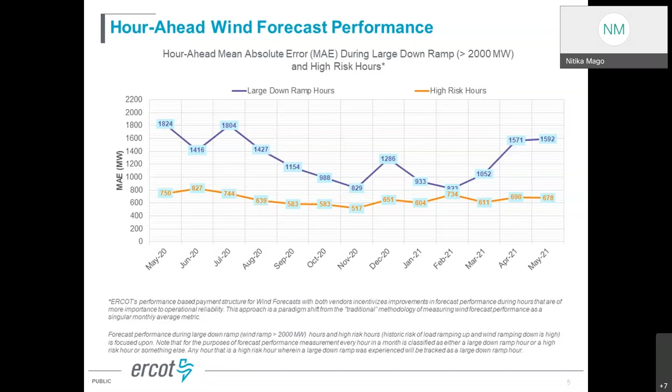And this is important because the forecast that we receive gets used in all of our look-ahead studies, so reliability unit commitment, outage coordination, next day studies, all use the most recent forecast we receive. So we want to make sure that those forecasts are appropriately capturing the conditions that the grid will be experiencing.

In 2017, we also added a new desk in our control room called the Reliability Risk Desk. And really the background here was with the amount of wind and solar resources that we were adding, the type of variability, the type of risk assessments the control room was having to do was growing, and we felt we needed a dedicated desk in the control room to run those what-if assessments, to run those risk assessments and communicate with the traditional desks on actions they may need to take around ensuring the forecast that they are selecting is appropriate for conditions that are coming on, ensuring that the units that are operating are following our performance requirements the way we want, and so on.

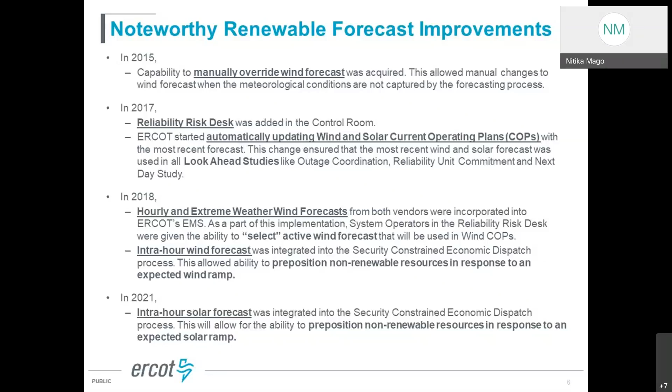So the STWPF, which is the 50th percentile probability of exceedance model. The extreme weather has 2 versions of it, so they've got extreme weather 1 and extreme weather 2. And the control room has the ability to select which model will be active. So through this we make sure that the forecast that is selected represents the conditions that will be coming.

Philosophically, this display was set up to replicate the existing displays we had for load forecast. Load forecast is also inherently built into our EMS, and the control room has the ability to toggle between models based off of the conditions that they expect to be the most representative of the grid conditions. This display was very similar in its usage to that particular tool.

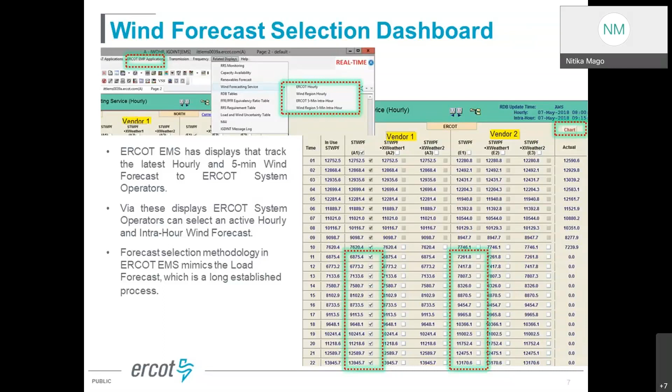As the conditions on the ground worsened, our wind resources started submitting outage data in our outage scheduler, and the forecast that we were receiving started showing us essentially only the remaining forecasted impact. So through this, we were able to maintain our line of sight on what we could expect the supply from our wind resources to be during that extreme weather period.

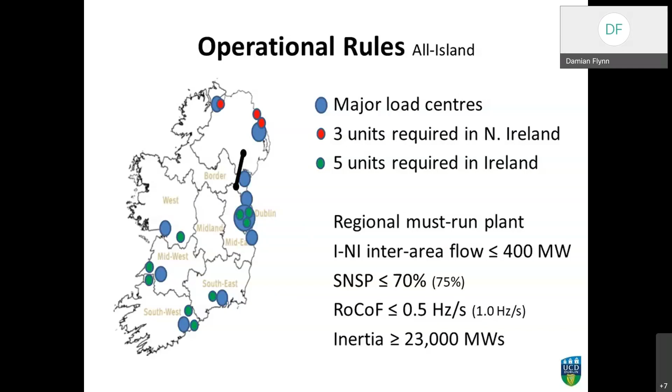And then there are also various dynamic limits, rate of change of frequency. Currently the limit is 0.5 hertz per second. There are trials underway at 1 hertz per second. And there's also an inertial limit of 23,000 megawatt seconds.

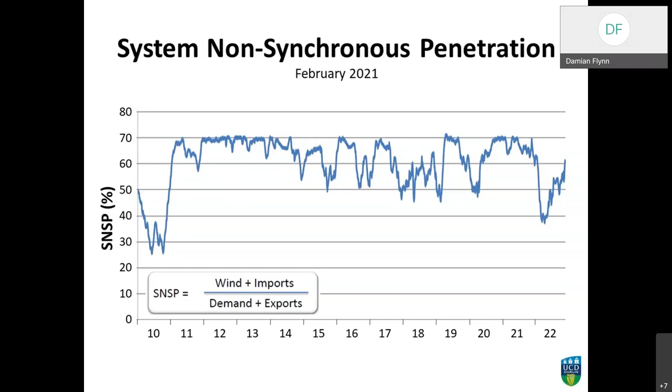So what we have in Ireland is a system that is operating at its limit in terms of system stability at certain times. And that does mean that there is curtailment or constraints on the system.

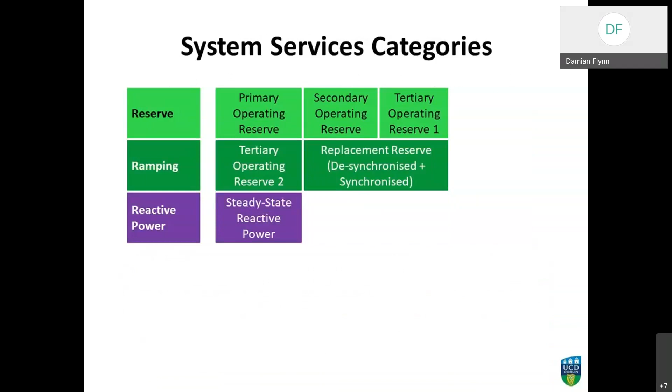There are also a number of system services on the system. Traditionally, there would have been 7 system services. In the last couple of years, because of the levels of wind on the system, that number has increased to 14. You can see there are 3 additional ramping products. There's also a synchronous inertial response product, which is designed to give you synchronous inertia, but also to reduce min-gen levels on the system. And then also a number of fast acting products, which I'll talk about later.

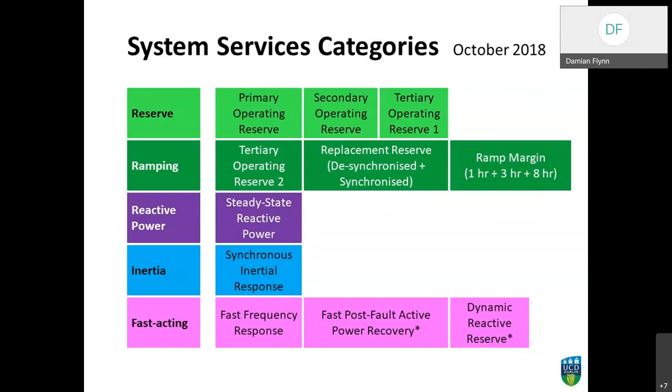These system services are arranged either through tariffs or contracts. There are set prices, and then there are a number of scalers which encourage people to improve their performance. If you can provide faster than default response, you get a larger payment. If you can provide a dynamic response as opposed to a stepped response, again you get a larger payment. If you're able to supply a number of products in sequence, from a fast frequency time frame through a primary, through a secondary, through a tertiary time frame, again you get increased payments. So it's about encouraging flexibility to the system and going beyond the standard definitions of the products.

So that was a quick overview of the present day. Now let's look towards the future.

Since 2019, there has been a change of government in Ireland, and the new Minister for Energy is from the Green Party, which has very much encouraged the Irish government's motivation to do more in terms of climate action. Earlier this year, there was a climate bill released, which targeted 51% emissions reduction. That emissions reduction, if you work it out, is actually more ambitious than the various renewables targets and the onshore wind and grid scale solar. So it's expected within the next couple of weeks that these existing targets are going to be further raised. So we have high ambition as it is, but that ambition is going to be increased. That would be the expectation.

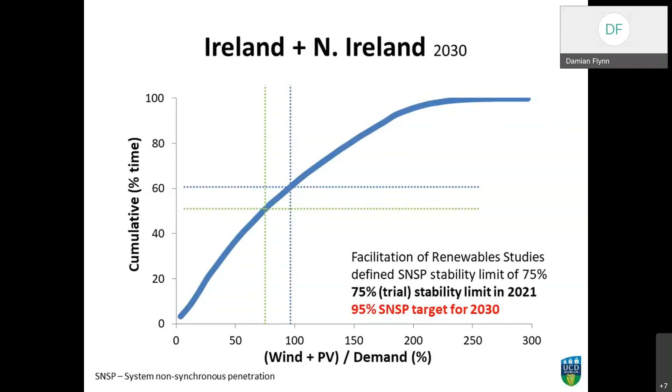And Ireland is an island system, so it has limited export opportunities. So as part of a European project, EU Sysflex, led by EirGrid, one of the things that was done across the European system was to look at the scarcities in terms of stability challenges, for continental Europe, Ireland and Northern Ireland, and the Nordic system. If we focus on the Ireland and Northern Ireland system, you can see, perhaps not surprisingly given Ireland's ambition and given that it's a synchronously isolated system, that there are a lot of red issues - a lot of stability issues that need to be resolved.

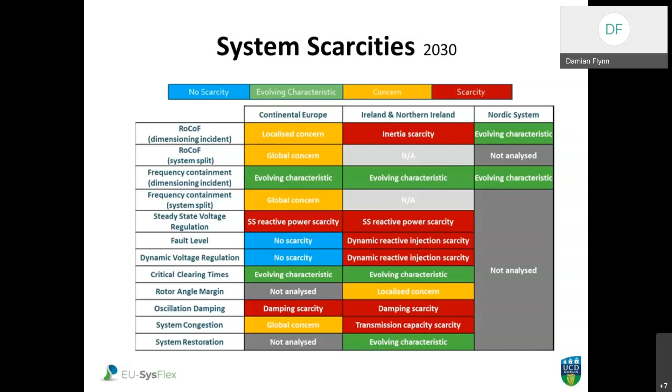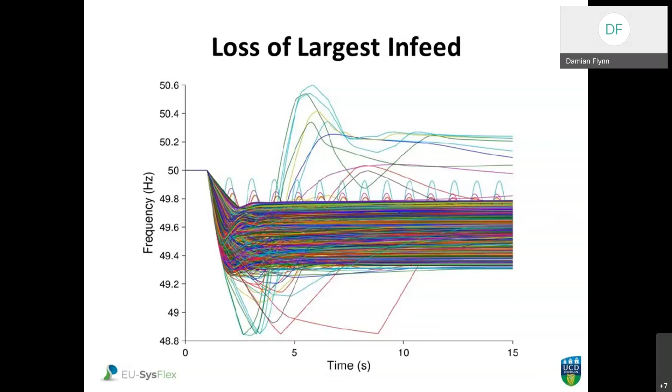If you then look at individual traces, you can actually see that there is quite a lot of variation. The first thing is that because you have a very high wind and solar PV system, things happen very quickly, and you can have cases of low frequency transients, but you can also have high frequency transients depending on how you set up your static reserve for the system. As you remove more conventional generation from the system, then steady state reactive power becomes a challenge, and hence there's a need for steady state reactive power system services.

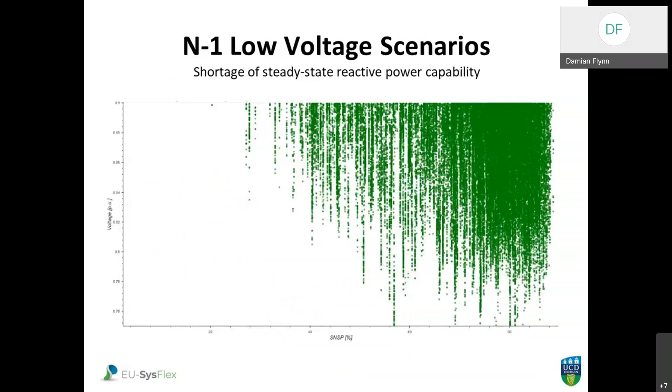Similarly, your network can become overloaded. So at the moment, there isn't any congestion-related system services, but there are thoughts that perhaps in the future there might be system services that encourage congestion relief measures. And of course, if you look at fault conditions as well, this is looking at faults in 2 different locations, A and B, 2 different time steps. If we focus on the green curve, you can see that there is a lot of oscillatory behavior, which again is promoting the idea of a system service related to dynamic reactive response.

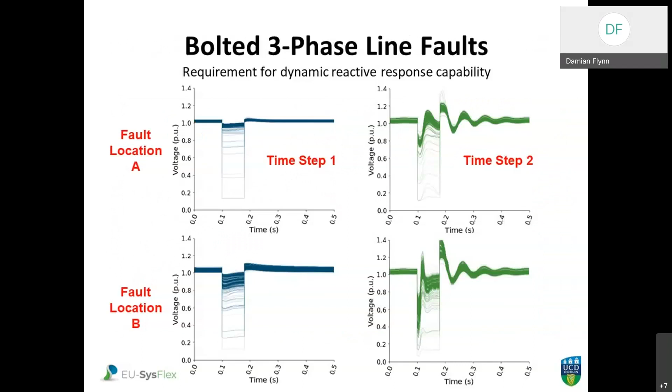So I suppose those stability issues are reasonably familiar. If I mention one that is perhaps not quite so familiar, the idea of a voltage dip induced frequency dip. On the top curve, the voltage trace, we're looking at a voltage dip that has occurred somewhere in the network. And in the lower figure in red, what we're showing is the typical response of a conventional generator, so that once the fault clears, the power output quickly recovers to its nominal level. For a wind turbine, it may take some time to recover to its full output, and so there is a power imbalance briefly, hence the shaded or hashed blue area.

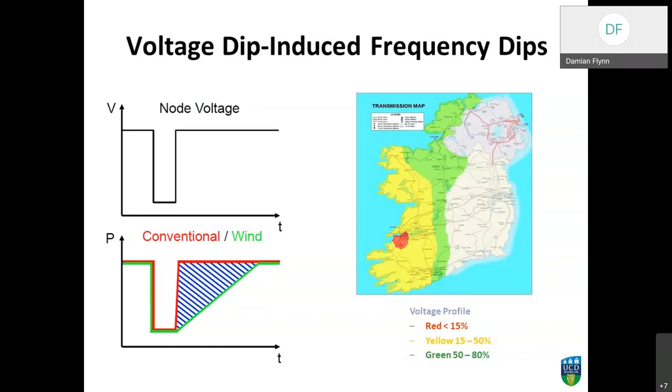So the concern would be that if you have a fault in, let's say, the red location on the map, and you've got a lot of wind turbines or wind farms nearby, then they could all see a large voltage dip, and then they could all see a drop in power for a short period of time. This is just an illustration of the problem. If you look at the lower figure, you can see that the power imbalance goes down to a level of around 3,000 megawatts. To put that into context, if you remember back to my earlier slide, I was talking about the Irish system having a peak demand of 6 or 7 gigawatts. So losing 3 gigawatts, even if it is temporarily, is an interesting problem to solve.

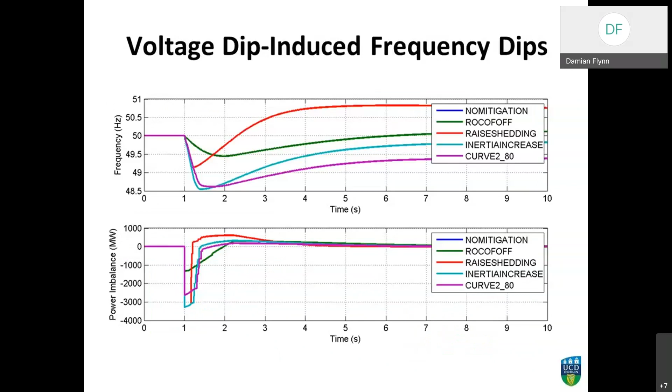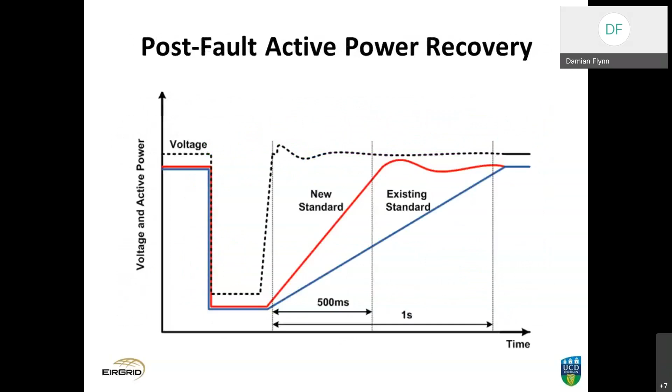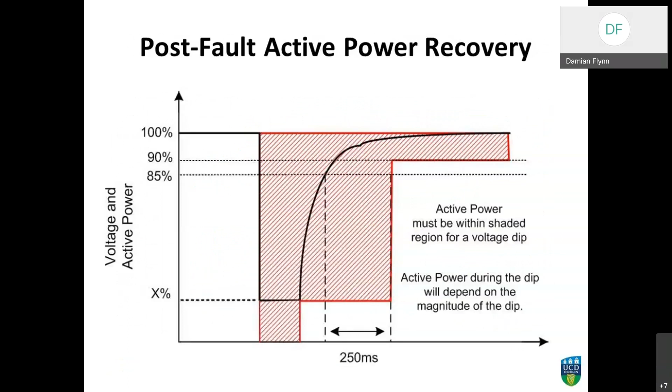So the solution has been to modify or propose modifications for fault ride-through characteristics. So originally, the recovery time was set at 1 second. That was reduced to half a second. And a system service has also been introduced called the post-fault active power recovery service, which further encourages participants to provide a response within 250 milliseconds or to recover within 250 milliseconds.

If I can also talk a little bit briefly about 100% SNSP. So yes, Ireland is looking at 95% SNSP by the end of the decade, but that's not too far away from 100% SNSP. So as part of another European project known as the Migrate project, studies suggested that perhaps a third of converters, whether they be wind or PV, should be grid forming. And it would be beneficial if that grid forming capability was distributed around the system.

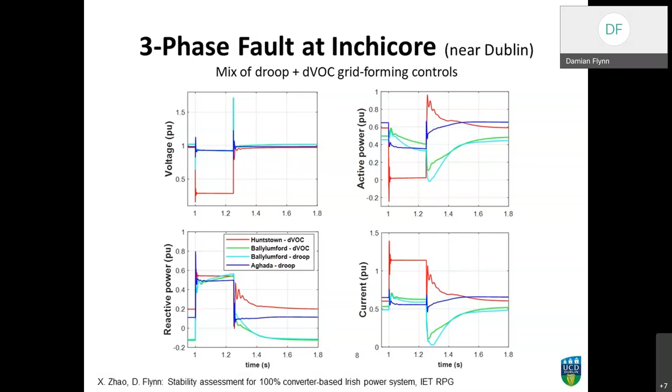So the final thing I want to talk about is, again, going back to forecasting, but I'm using forecasting here in perhaps a slightly different timescale to the other presenters. So I'm looking at forecasting towards the end of the century. And what I'm thinking about here from a system adequacy point of view is, as we add more wind and solar to the system, is there the possibility that there will be periods of insufficient generation to meet the demand?

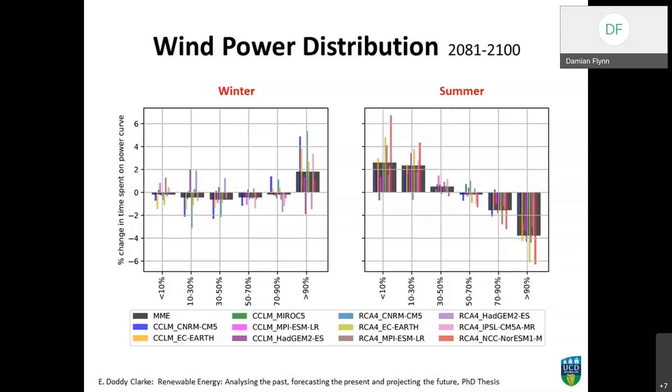So the winter time, that's good news for Ireland because it tends to have a winter peak. In the summertime, it will be less windy, but the contrast is that there should be solar PV on the system, which will help under those situations. And as I say, the question of interest is looking at periods of extended low power. So my definition here is a period of 1 day or longer whenever the power levels are less than 10%.

So if I just end up with some final questions that I suppose are of interest to all systems. One, Ireland is looking at how it can achieve cost-effective operation with increasing renewables and getting closer and closer to a system that is just wind and PV effectively for significant periods of time. A challenge for many systems is how can you do this without building new transmission lines? And how can you maintain system adequacy if you're moving to variable generation?

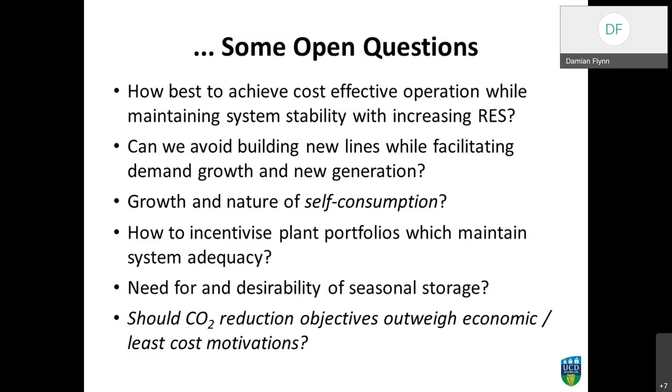So the next speaker, or the final speaker, is Rhett Trease from Duke Energy. Rhett's a lead engineer. He's worked in real-time operations and unit commitment in all of Duke Energy service territories. He's a former load and solar forecaster and was a lead engineer in their fuels and system optimization before moving to his current role in the integrated system operations and planning group. So Rhett's going to talk a little bit about how Duke are thinking about reserves and forecasting.

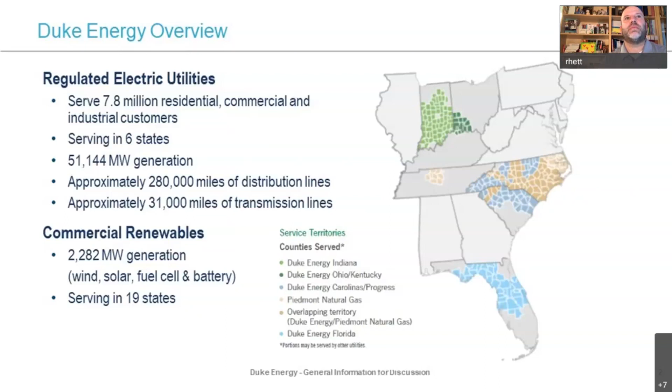We serve 7.8 million customers and a little over 51 gigawatts of regulated generation. We also have our commercial side of the company with a little over 2 gigawatts of renewable generation. And some of the challenges we're facing here sound kind of familiar to everybody else. North Carolina is the largest state in the country for PURPA solar penetration. We have a lot of solar in DEP already, and it's growing at a very steady and predictable rate. We have a lot of DEC. It's starting to pick up in the Carolinas, and certainly in Florida it's picking up at a very fast pace, both rooftop and utility scale solar.

One of the challenges we face in the southeastern portion of our territories is we tend to be winter peaking, which is a little backwards, but it does get cold in the south, and we have a lot of heat pumps and a lot of resistive and electric heating. So we have a lot of solar. It's not very windy towards the southeast U.S. There's not a lot of wind generation, but a lot of sun. And we'll tend to peak in the morning when it's dark out, and then solar will pop up, and these ramps are starting to get fairly severe. Then they'll go away, and we'll get our typical duck curve.

In the Carolinas, we also have 11 nuclear units, so we don't always have a lot of load to play with and generation to move around in the afternoon with the non-dispatchable nuclear units. We're starting to see a lot of backflow issues, more local issues as was shared in the ERCOT presentation. And generally, we're starting to see a lot more demand from our customer needs. We're seeing a lot of EVs and grid storage or fleet charging pop up. A lot more rooftop solar, can be a few hundred customers a month. Lots of new things happening, and I don't think that's news to anybody on the call.

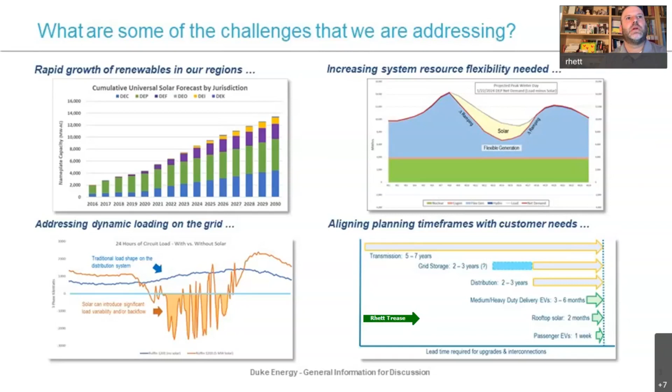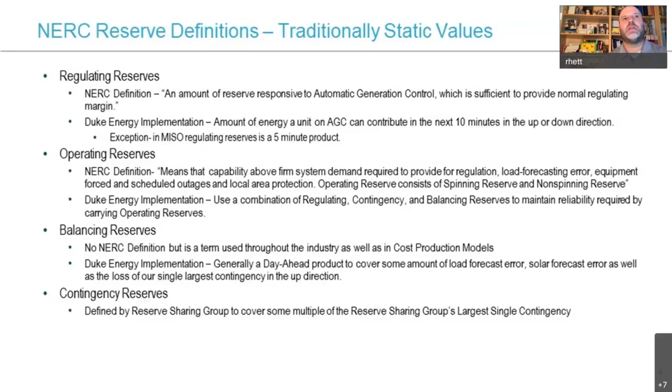Where our ramps are picking up as well. We certainly need a lot of down reserves as load's going down, a lot of up reserves as load's going up, and not a lot on the opposite side. And that's from a ramping perspective.

But as you start to get higher temperatures, upper 90s, and maybe a shower moves in and crushes load, or the shower doesn't show up and load screams when it's really humid out, and we have a lot of air conditioning load. So definitely on the tail events, not only is load higher, but your forecast errors tend to be greater in areas with high HVAC loads.

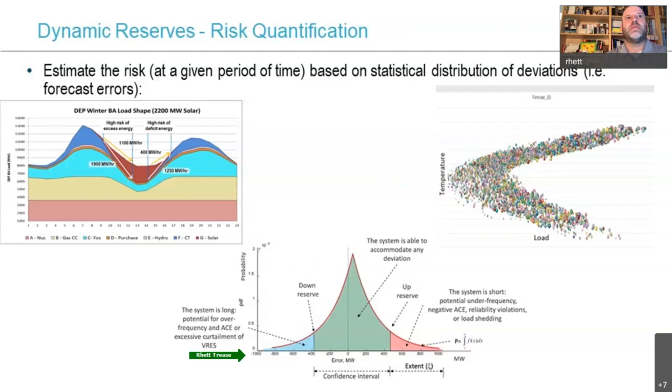So one of the places we started, EPRI published a few years ago their DynADOR tool. Originally, it was pretty much based in operations and real-time reserve calculations. They've added some functionality. A couple of us asked at the beginning for some functionality for long-term studies. You can study all kinds of different balancing areas. Basically, at a high level, you import your historical load, solar, and wind profiles.

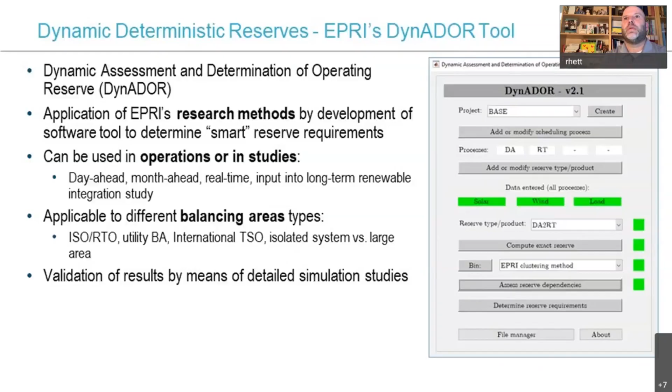That's probably the hardest part of the tool, trying to come up with, especially for future scenarios, what the load, solar, and wind will be at 5, 10, whatever granularity you want, and then it calculates the stochastic forecast. What are we going to do with those?

So a few years ago now, we entered into the OpSun project with the Department of Energy. EPRI is the lead. I'd be remiss to neglect our partners here, Duke Energy, Southern, Hawaii, and then UL, Virginia Tech, and Polaris. At a high level, there's 3 spokes of the wheel, or pillars of the project. First, you have to forecast, the probabilistic forecast. And when I was solar forecasting, we generated a probabilistic forecast.

What do you do with it, right? There's all kinds of data you can generate, but you need some method for managing that uncertainty. And it's great to standardize and simulate and figure out what those methods should be. And then the last pillar, closing the loop, is to demonstrate it. They've got a scheduling management platform I'll share in just a second, to integrate those probabilistic forecasts. And there's some studies on the back end to evaluate which reserve methodology is the most optimal, least cost.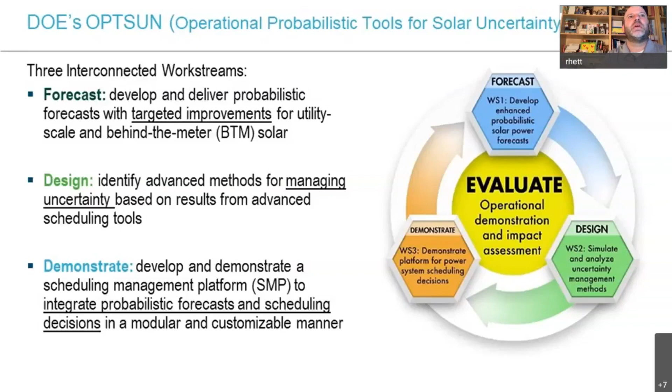So for the spokes of the wheel, there's lots of different ways to do this, and that's part of the DOE project. The traditional, where we started, you grab your percentile, 95th, 90th, 70th, 60th, whatever percentile it may be, in the up and down direction. You've got your median forecast in the middle, maybe 80th percentile on the top, 20th percentile on the bottom.

And so what method do you use? We've tested a few different methods here. I can't say this is exhaustive, and you don't have to really pick one. You could use one bounded by another. They've started with stochastic, running a bunch of different scenarios and generating the min cost. Next one's interval.

How do you make sure you can get from one time step to the next for every timestamp, whether it's time step, 10 minute, 5 minute? One of the tough things is trying to figure out what that time step should be, whether 5, 10, hour, 2 hour, 4 hour, and every system's different, and every system kind of has its own constraints, day ahead, etc.

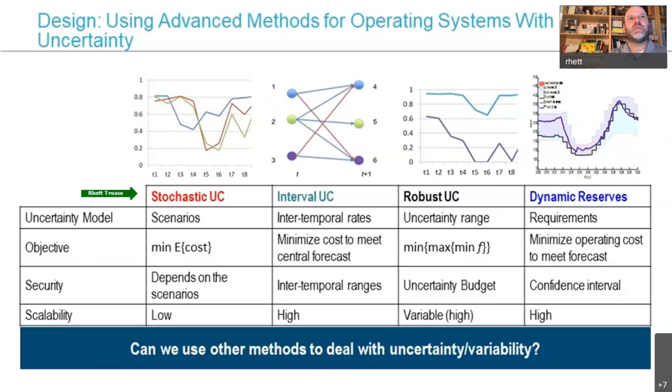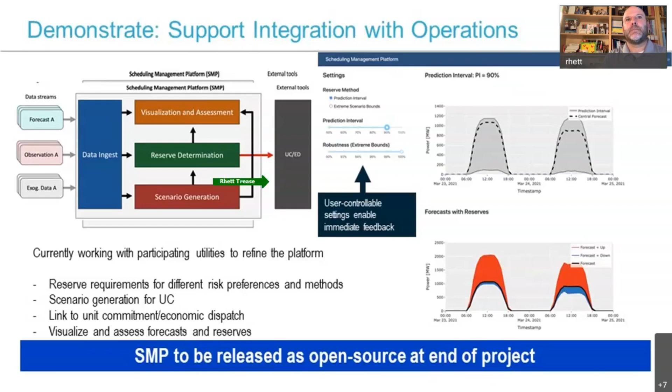And then closing the loop, there's running unit commitment and economic dispatch on the back end. You run one forecast with one methodology, you compare it to another one, base case, change case, to evaluate the different operations methodologies and to calculate, if we ran it this way or that way, what were the cost implications of running different reserve methodologies. And this one is going to be released as an open source project at the end.

So to close it out, I have more questions than answers here, just like anybody else. What are the products needed? Regulating reserves? We had the fast reserves in Ireland. We're not there yet in the Carolinas, but are we going to need those eventually? Contingency reserves, balancing reserves, etc. How do we integrate these across operations and planning? At what time scale? And this really varies by region and assets. Some regions are not day ahead constrained at all. Everything can start up in 4 hours, they have plenty of gas, and there's no constraint there at all. Some regions are coal heavy and have a lot of day ahead requirements.

One of the things we're trying to evaluate in the study is do these hold at scale? So 5%, 10%, 20%, Ireland's there, so it'd be interesting to talk to them. They're a little bit ahead of us in that regard. But do these same methodologies hold as you double, triple your renewable penetrations, and then do they hold at interconnection scale? So we have a lot of solar in North Carolina. As our neighbors build out, does it still hold when the whole entire interconnection, the eastern interconnection, does that?